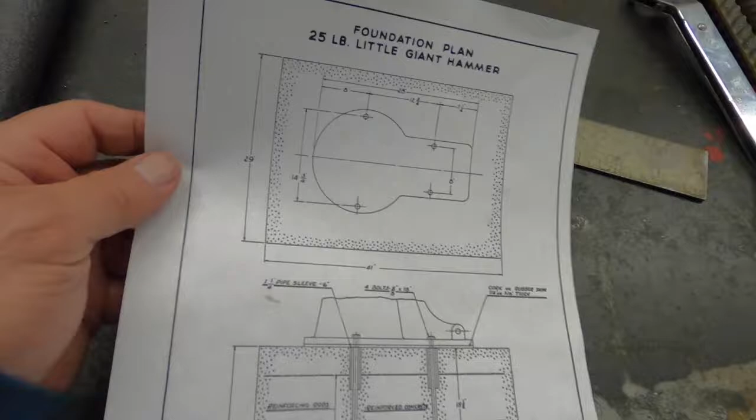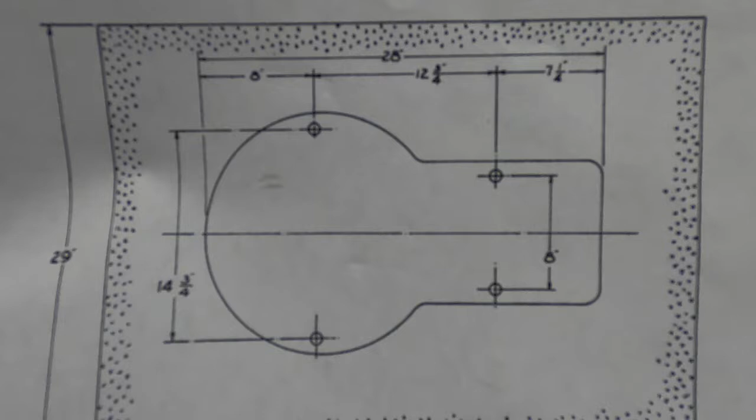Here's the foundation plans for Little Giant power hammer. As you can see, they give you the hole location measurements and the actual outside dimensions of the footing. These hole locations weren't real close to mine. The close together ones were off by about a ½ inch, so I didn't use those. That got me questioning those measurements, but anyway, I didn't use them.

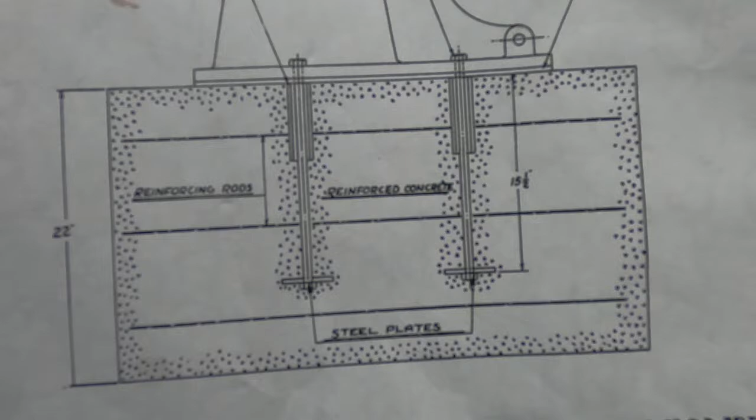And here's the bolt and rebar layout and the depth. We're calling for a 22-inch depth on this. I hope I can dig a hole that deep. Anyway, this is what I obtained off the internet.

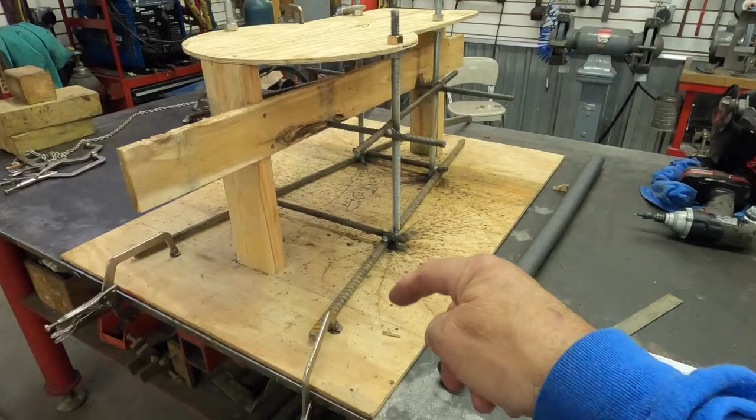This is what we built. The bottom piece of plywood is the actual dimensions of the base, the footing that it'll sit on. They're 29 by 41, so that's the actual size of the concrete pad I got to pour.

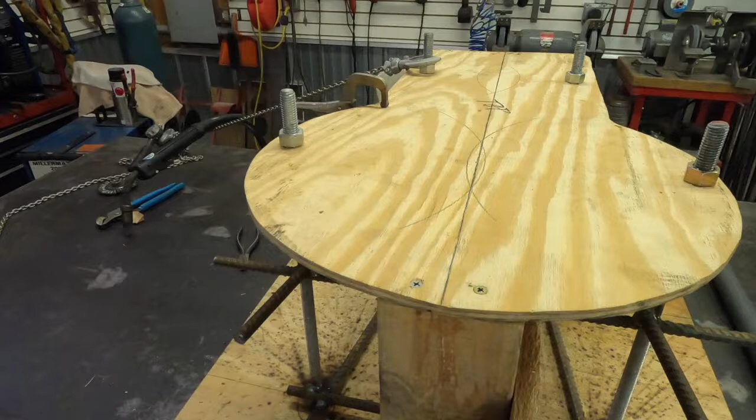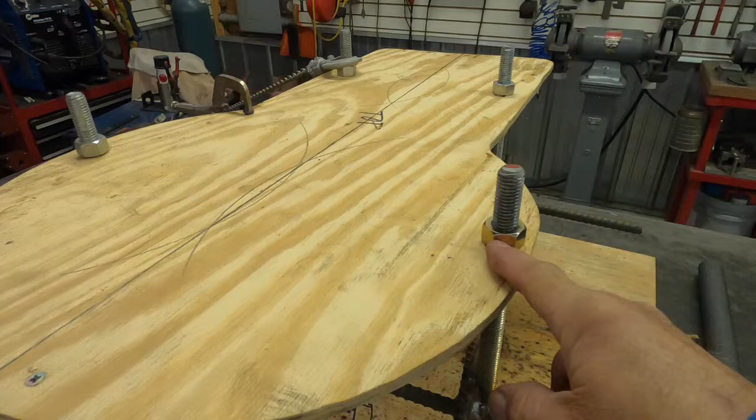This top piece here, I set a piece of plywood under my Little Giant and traced this out and traced the hole locations. Like I said, I was questioning the measurements on that plan, so I did my own. I actually put short bolts in these holes after I got it all cut out and set the Little Giant down on there to make sure that these bolt locations, the 4 spots, were all good.

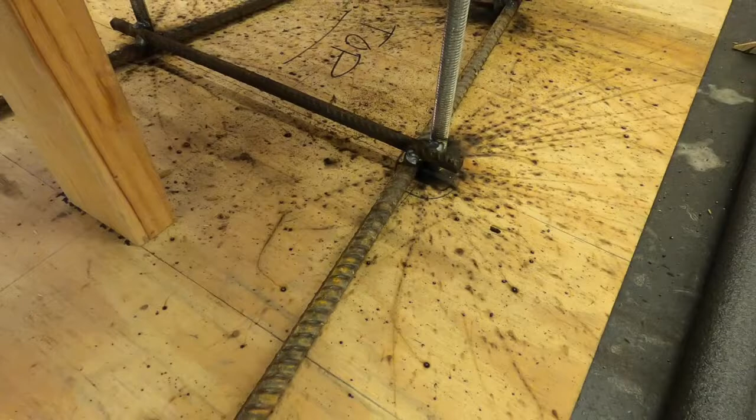But anyway, we welded up some all thread and rebar here to hold our bolt locations and give it a little bit of support down in that concrete. I think this dimension here right now is 16 inches. So we gotta have another 6 inches in there somewhere to get to the 22. We'll probably set these bottom bars up on some little chunks of concrete risers. But anyway, that's the plan.

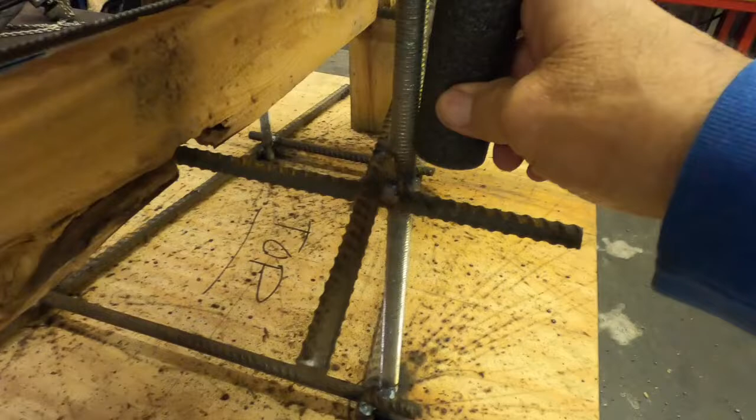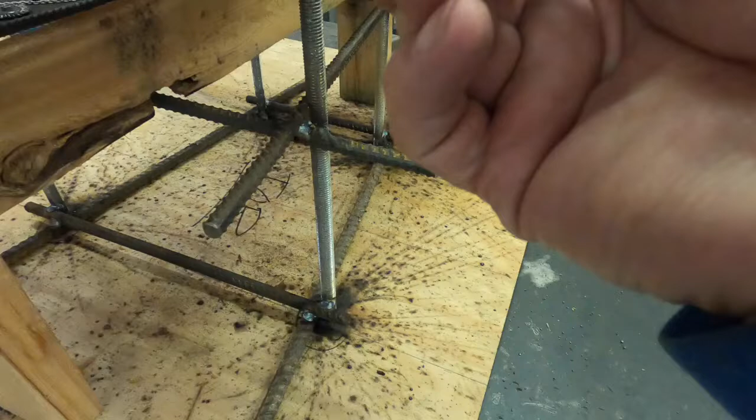I got some of this pipe insulation stuff. We're going to run that down over the bolts, probably to this top piece of rebar right here. That'll be a good 6 inches. So we'll have a little bit of give in the bolts. If we got to pry them one way or the other, they won't be solidly mounted in that concrete.

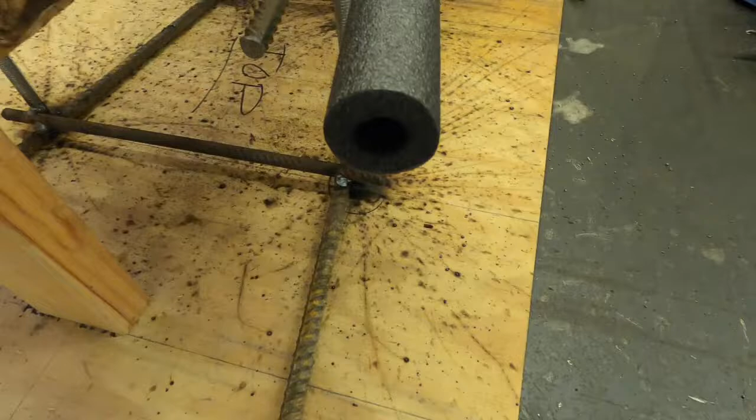Anyway, we'll get this thing all taken apart, it's just all screwed together plywood, and then we can finish welding the bottom side of everything. Make sure it's all going to stay together nicely. I don't know if it needs any more support than that. But anyway, like I said, I just wanted to give you a quick look at what we were doing here.

It's beginning to be quite the project. I'll be glad when I get it down where I can hammer away again. But that's how these things usually go. That's why we do them. The more stuff you got, the more projects you have, the more you learn, the more fun you have.

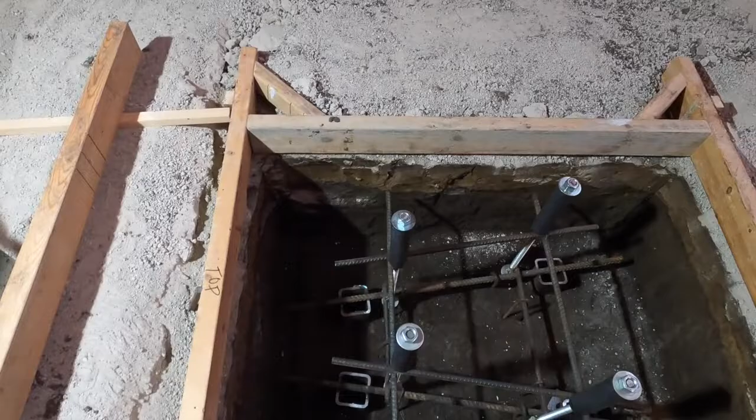Try to get a little light on the subject, but my hole ended up being, I gave it a little light there, 19 inches deep to the top of the footing here, or top of the 2x4. They called for 22, but I had pretty good hard pan down there about this deep. You can see the difference between the dirt.

When they built my building, they scraped off a lot of this black dirt to save for the landscaping, and filled with clay. So you got about a 6-inch clay bed, and then the rest of it's virgin black dirt. And it's pretty tough down there digging. So I figured that 19 inches was close enough.

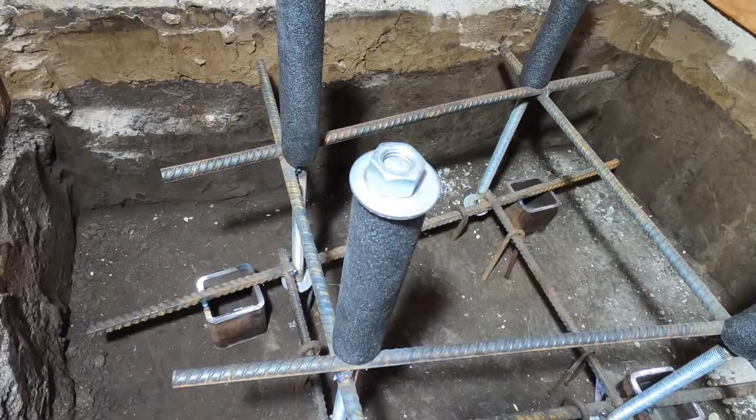But we got our rebar cage in there. You can see how I got the foam pipe insulation over my all thread. Got some nuts holding it down on there. Probably put a piece of tape over that, some duct tape or something. But it's, what is it, 29 by 41 here.

So it takes, I think it's 0.48 of a yard. So I just go down the trailer crete joint here and we'll get us a half a yard of concrete. Because as you can see, my hole size may not be the same, so I think a half yard will cover it. I hope it will. But that's where we're at on this project.

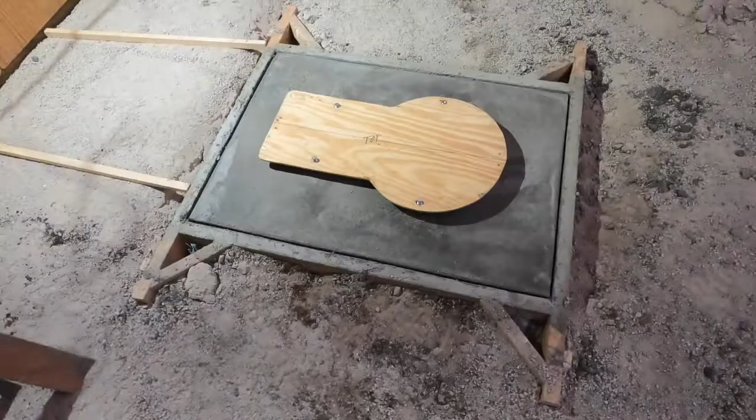All right, we got our footing poured for our little giant power hammer. It come out pretty good. There's a trailer crete place right down the street here, so that's what I used. They mixed it a little bit wet for my standards, but I think it'll be okay. It's what they call a 6.5 sack sand gravel mix. Supposedly good for 3,000 pounds per square inch.

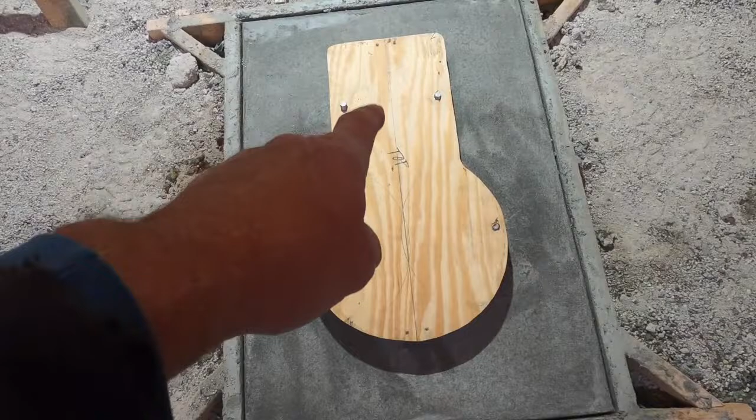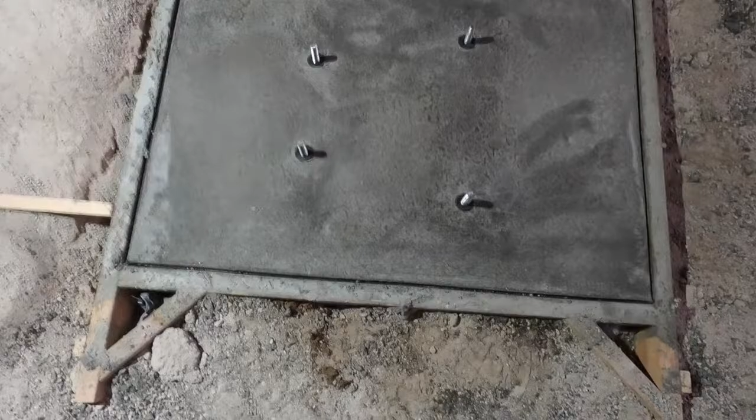But anyway, my pattern for my little giant base fits on the bolts, so that's one good sign. There's what it looks like now. I told you I put this foam around these studs so that if I have to fudge a little bit with them, I got a little bit of room to kind of hammer them over or whatever. But I did that with all of them.

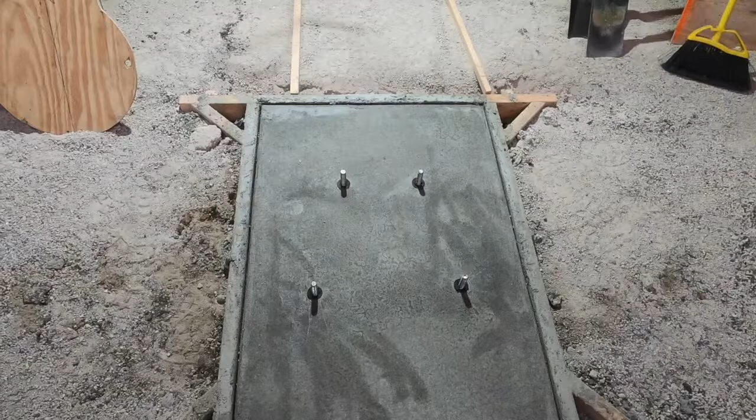It was almost exactly a half a yard of concrete. I ended up at 20 inches deep, basically. Like I said, they mixed it a little bit runny, but it made it easy to work with, but hard to finish off real good. So anyway, this footing is the last real step into getting my power hammer going. I can move it over here and set it on here and level out the dirt, or it's actually a regrind mix around this.

And I've heard several guys comment on using a stone or a regrind type floor for your blacksmith area. It's easier on tools when you drop them and don't have to worry about sweeping up or anything catching on fire.